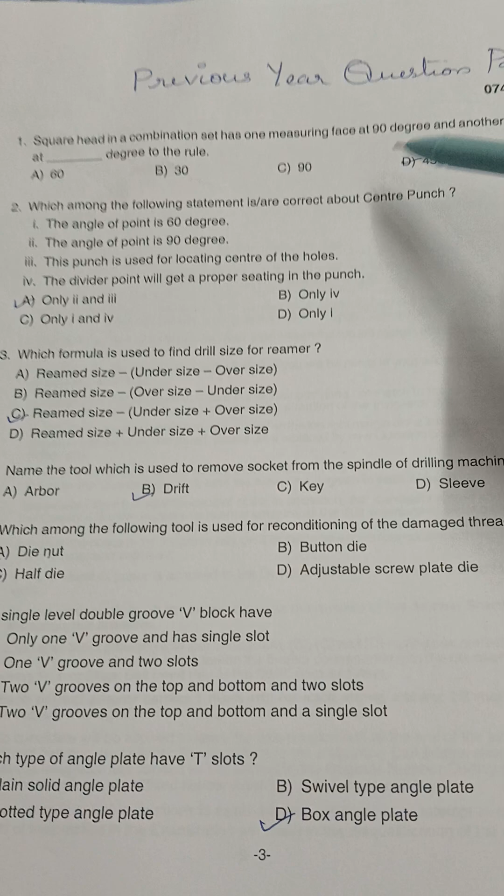Which among the following statement is correct about center punch? The angle of point is 90 degree, and this punch is used for locating center of the holes. So options 2 and 3 are correct.

Which formula is used to find drill size of reamer? That was reamed size minus undersize plus oversize.

Name the tool which is used to remove socket from the spindle of drilling machine. That is drift. Which tool? Drift tool.

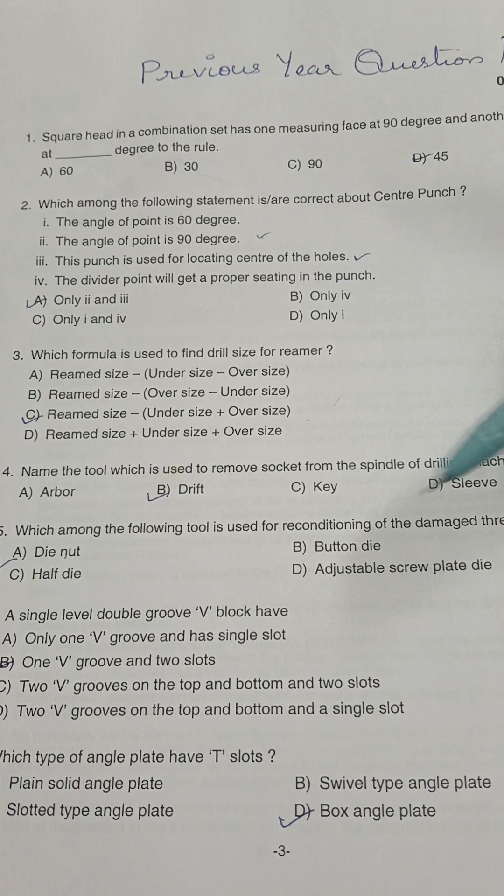Which among the following tool is used for reconditioning of the damaged thread? For reconditioning of damaged thread, die nut is used.

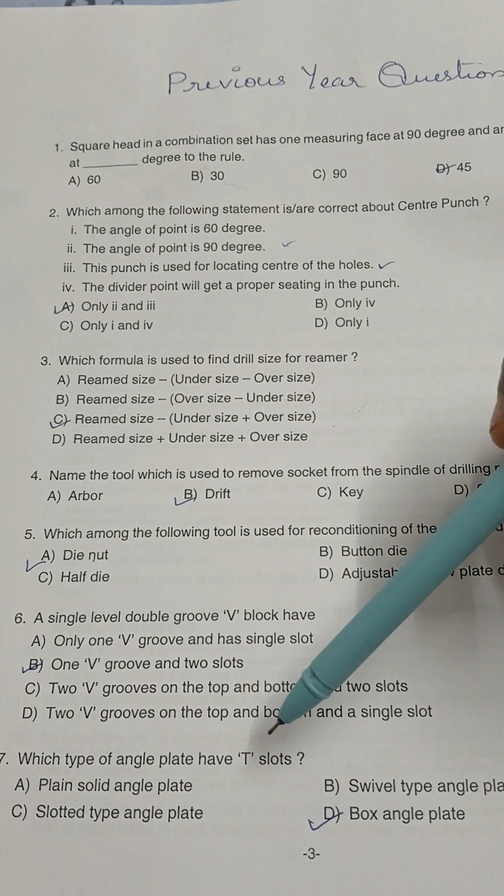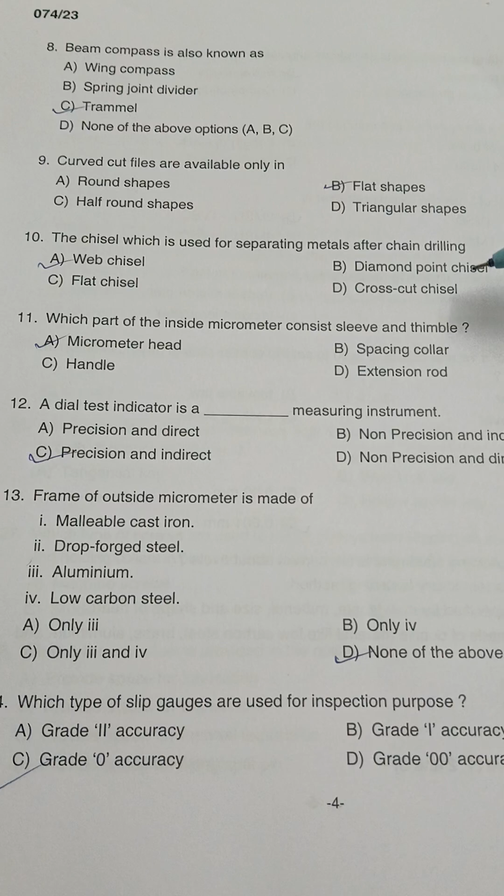Curved cut files are available only in flat shapes. The chisel which is used for separating metals after chain drilling is web chisel.

Which part of the inside micrometer consists sleeve and thimble? Micrometer head. A dial test indicator is a measuring instrument.

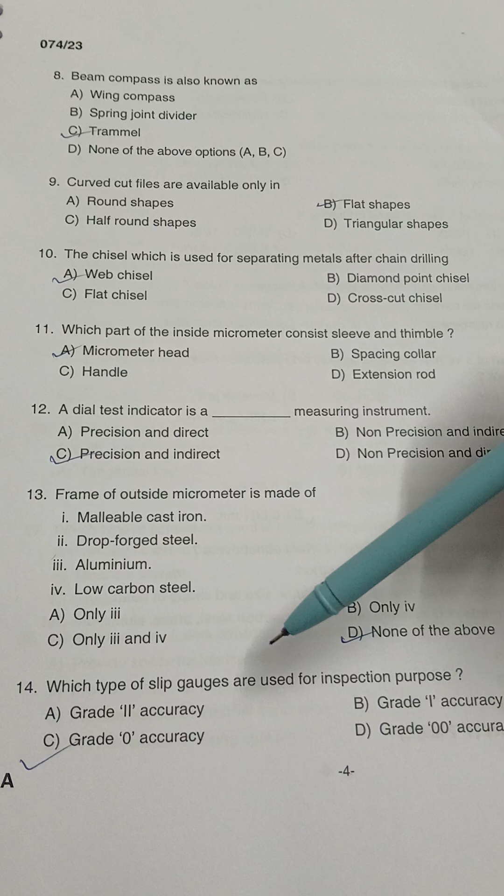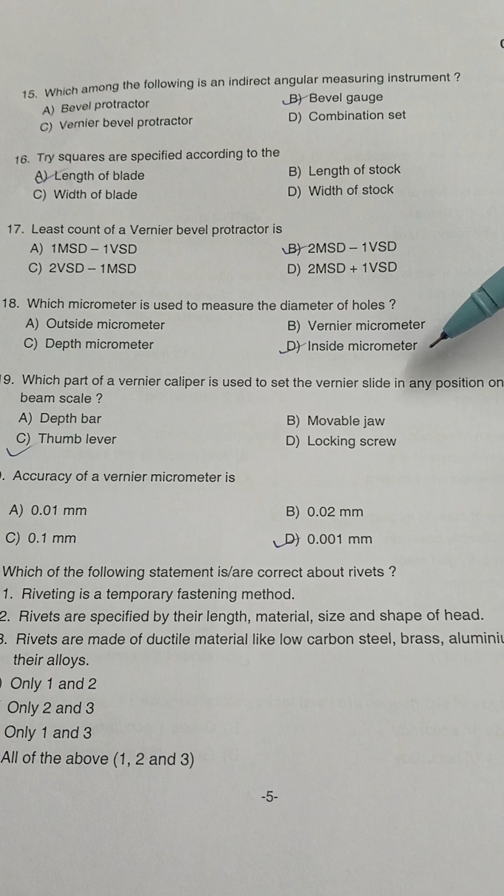Which micrometer is used to measure the diameter of holes, inside micrometer. Which part of a vernier caliper is used to set the vernier slide in any position on the beam scale? Thumb lever. Accuracy of a vernier micrometer is 0.001 mm.

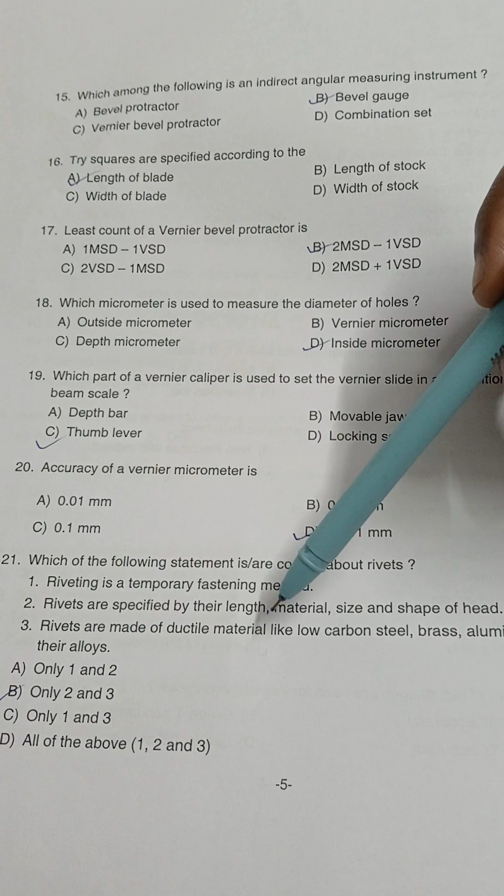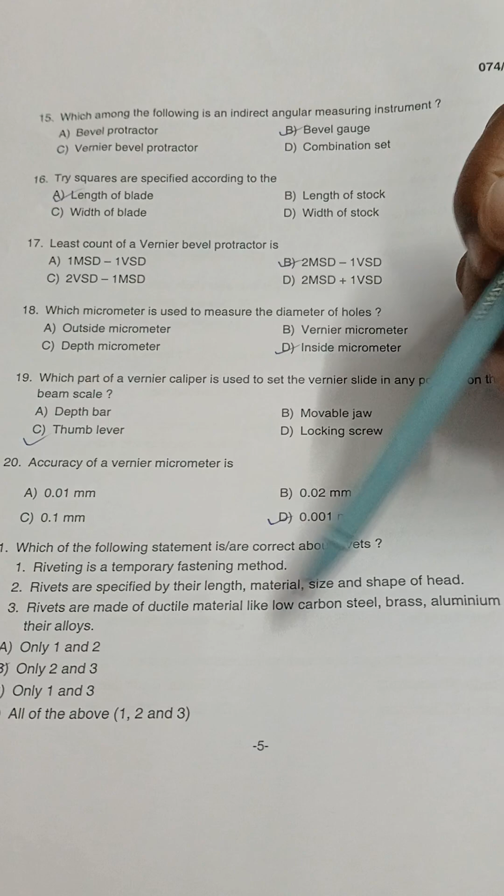Which of the following statement is or are correct about rivets? Rivets are specified by their length, material size and shape of head - that is correct. Rivets are made of ductile material like low carbon steel, brass, aluminum and their alloys. So 2 and 3 are correct, and option B is the right answer.

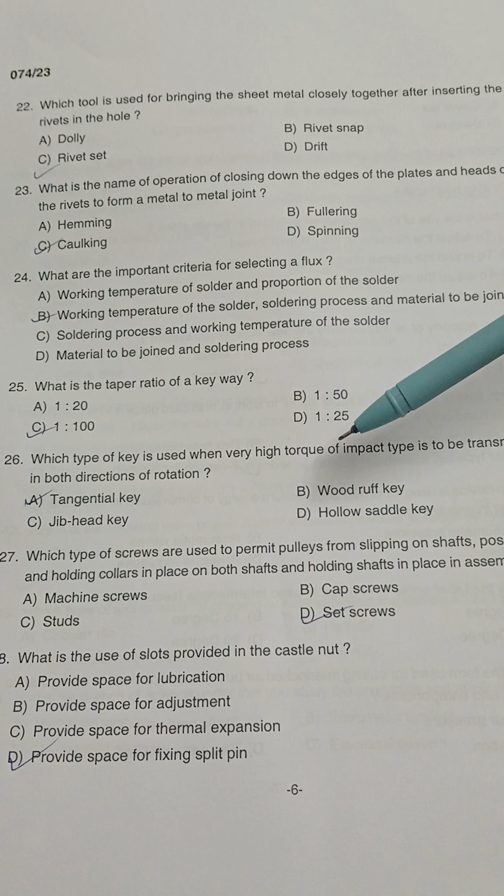Which type of screws are used to permit pulleys from slipping on shafts, positioning and holding collars in place on both shafts and holding shaft in place assemblies? That is set screws. What is the use of slots provided in the castle nut?

Provide space for fixing split pin. Which type of nut protects the bolt and thread from damages?

Cap nut. Which type of machine screws are used in heavy duty assembly work? Hexagonal screw.

What is the use of the center screw provided in the die stock? To adjust the depth of cut.

Which property of oil controls the flow in hydraulic system? Viscosity. Which type of tap wrench is more useful to work in restricted place and is used in single hand only?

T-handle tap wrench. Which device is used for converting pressure energy of compressed air into mechanical energy in pneumatics? That is pneumatic actuators. What is the taper angle of commonly used intermediate tap?

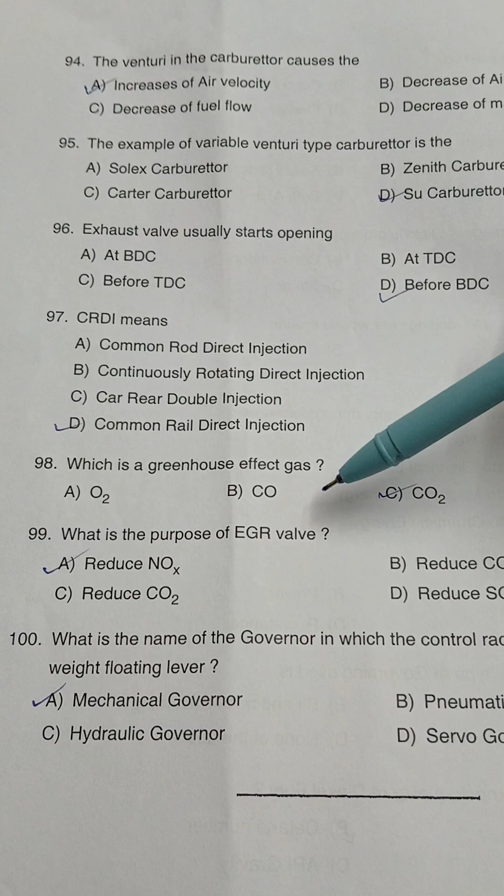Reduce NOx. What is the name of the governor in which the control rack is connected with a counterweight floating lever? Mechanical governor.